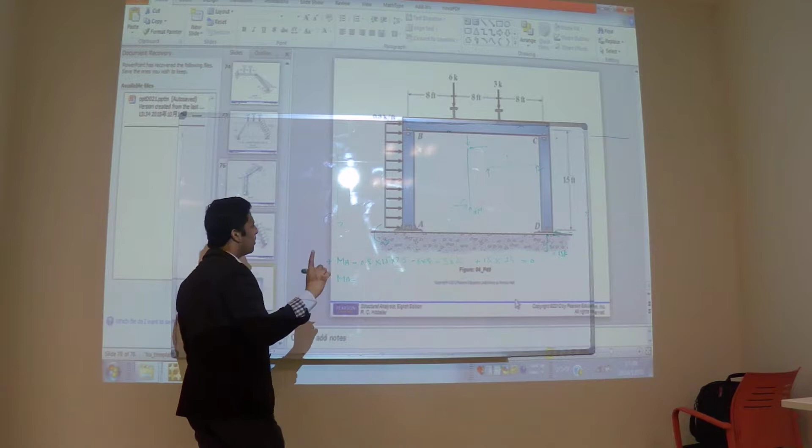I'll come back, but your homeworks remain still there. Now I told you this is B, A, and it is B, B. So now BA is equal to BB, you know this.

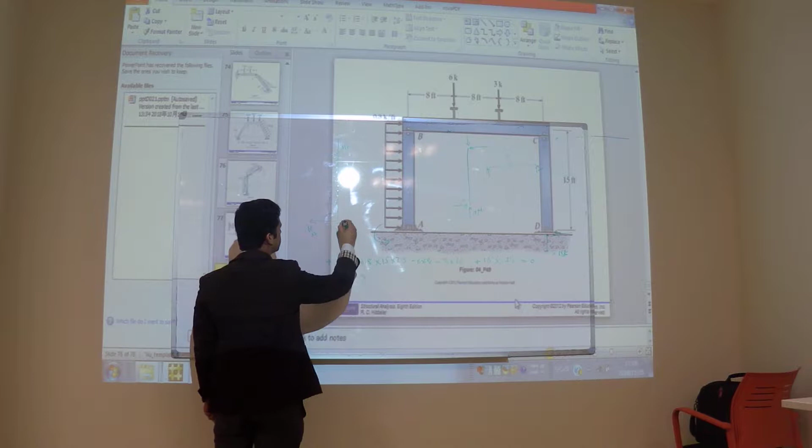This is HA, and M is how much? Whatever, you know this value, you know VA. Only HA is unknown, and now you can apply sigma fx, or you can apply, because there is one more here, I think it is HB. So you can take a moment here, you will get HA, because you know this moment, and once you have HA, you can apply sigma fx, you can get HB.

Is there need of homework, or you can do it? Yes, well try this at your home. But this is the only trick, the moment, which I explained to you right now.

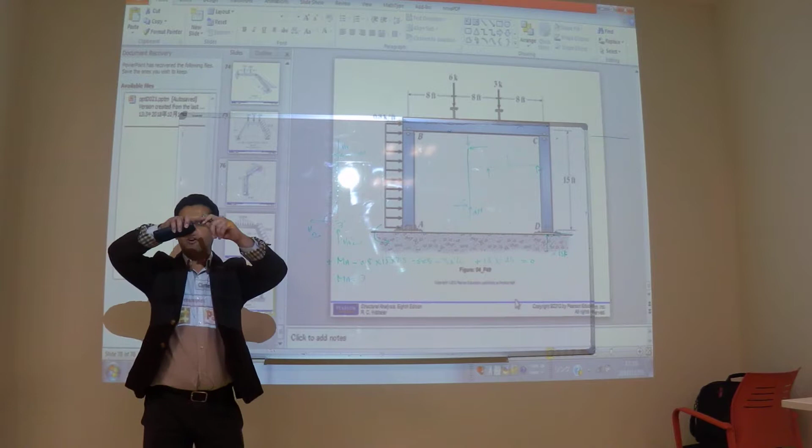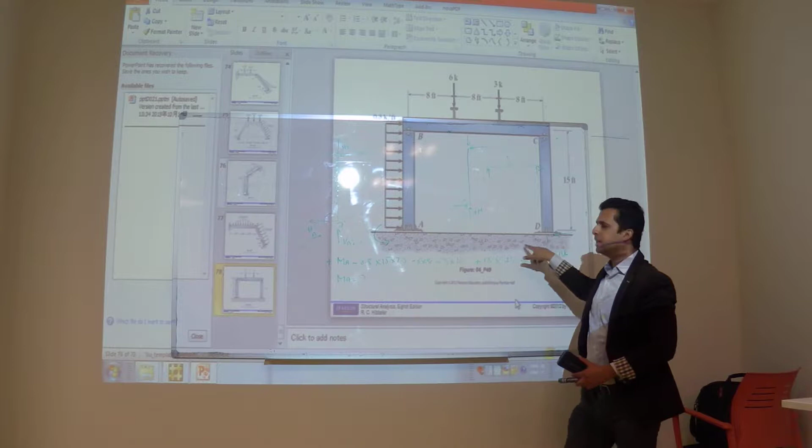First, divide into components, like this member separate, the other member separate, this member separate. Apply sigma fx, fy, sigma fx, fy, you will get the whole vertical reaction up to this point. And then consider this structure as a whole. 3 reactions here, 2 reactions here. Apply sigma m, you will get this m. This is the only thing.

Well, I don't want to teach you this today, but we have done it. If you still want me to solve one example, I can do that.

Victor, we want the example with frame with no pin connected. We already did, no, that's how we cut it.

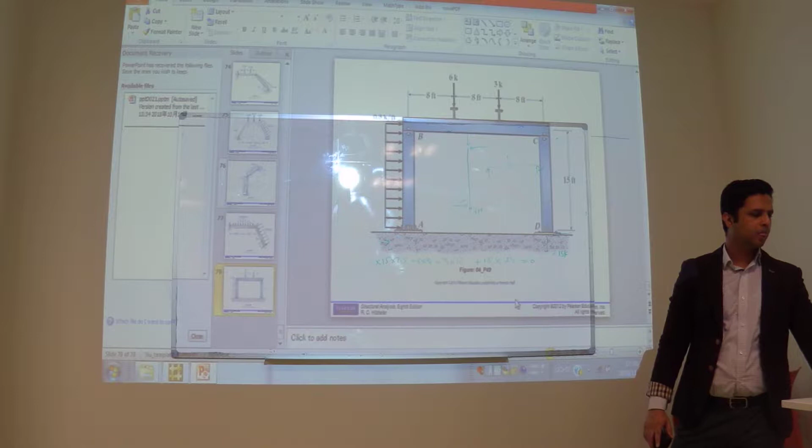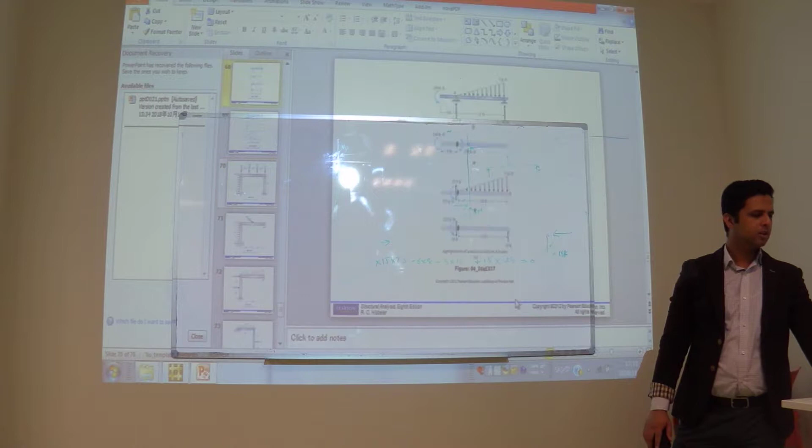We consider that as a joint? You mean this? No, the before one, but in the frame, this condition. No, there is a joint. No, there is something, just one X. It's all fixed. We did in our last class. Yes, but frame, not frame, we did just the half. No, we did, before that, we did some problem, something like this.

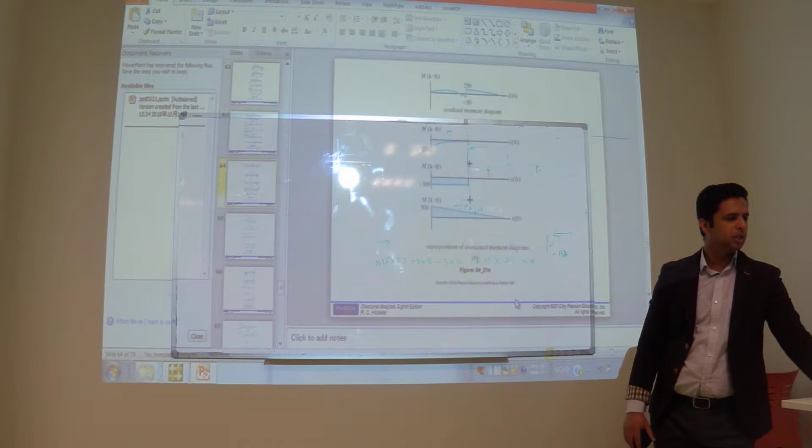If I remember, yes, there was a load like this, and 2 reactions, something like this, and you have one vertical load here. Yes, yeah, it is fixed. So how we cut it, Victor? No, we did not cut. We cut it and make the reaction.

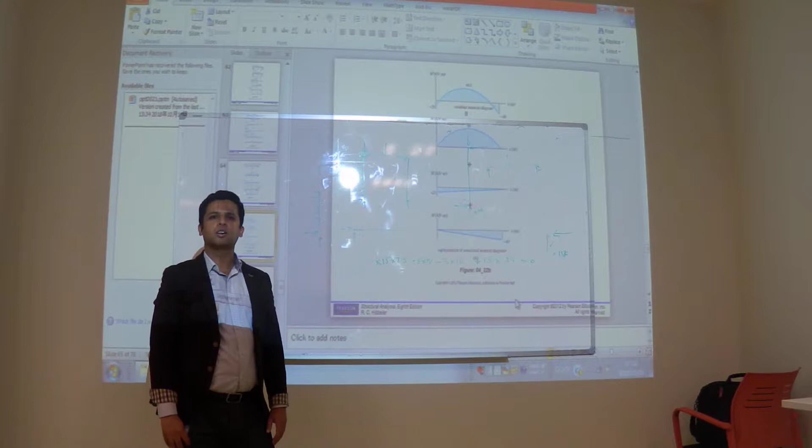We, for example, we just consider first this part, then we apply sigma fx fy, and then we made this joint, yeah, we made an equilibrium, these forces we transfer from here to this B. We have to, we have to separate it. Because yes, it's just one shape. So we did that, okay, we have moment also in this, here, in the corner, up corner.

Yes, we also have the moment here, I remember there was a moment. So then you transfer this moment from this joint to this joint.

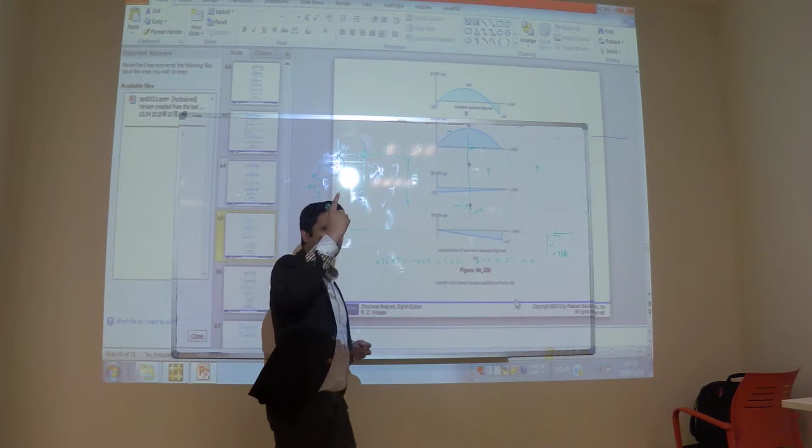Just revise my previous lecture. You know, I told you, if you do not revise your previous lecture, it's gonna be very hard for you. Structural analysis is not like history or some social sciences, so that if you come back, everything will be in your mind. Until and unless you repeat or you study the previous class, I don't understand.

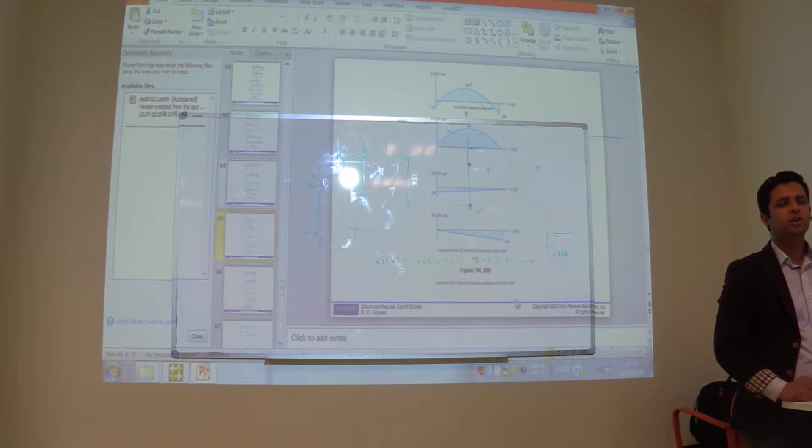Now you are at the peak of shear force and bending moment diagrams for the beams and for the frames. And from here we will go to the next level. We will not go down. Okay, do you have any other question?

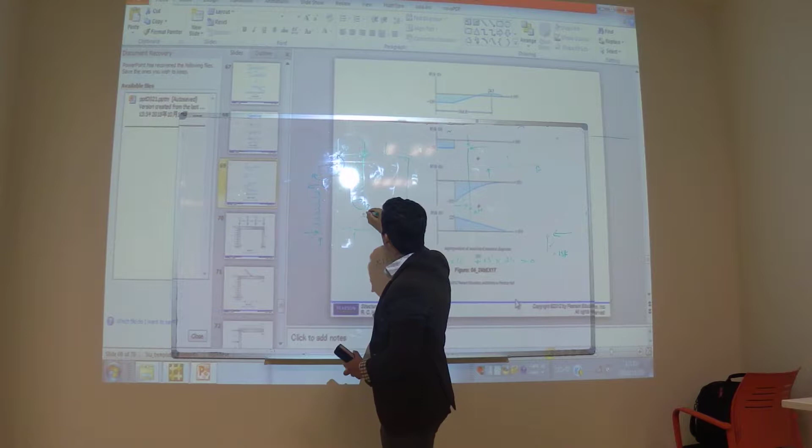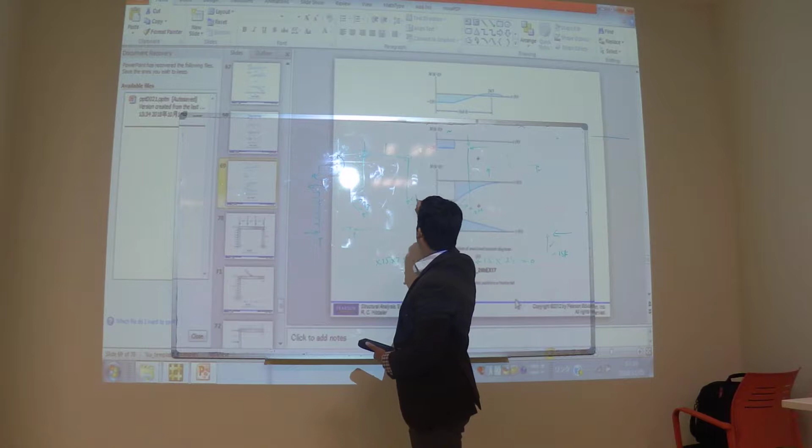So this frame, there is a fix at A, but in our last class, for example, if there is a fix here, so moment M, now you cannot solve this frame. Now this frame is known as indeterminate frame. If a frame has two fixed supports, one fixed support here, another there, it will become indeterminate. You cannot solve this frame now. Do you understand? Yes, two fix, but just one fix we can solve it.

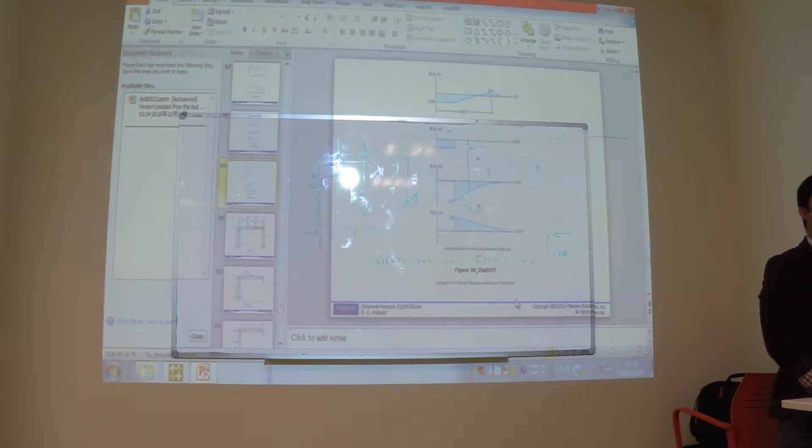Depends, two fix we cannot solve. You have to apply the equations for determinacy and indeterminacy. Okay, you have to check.

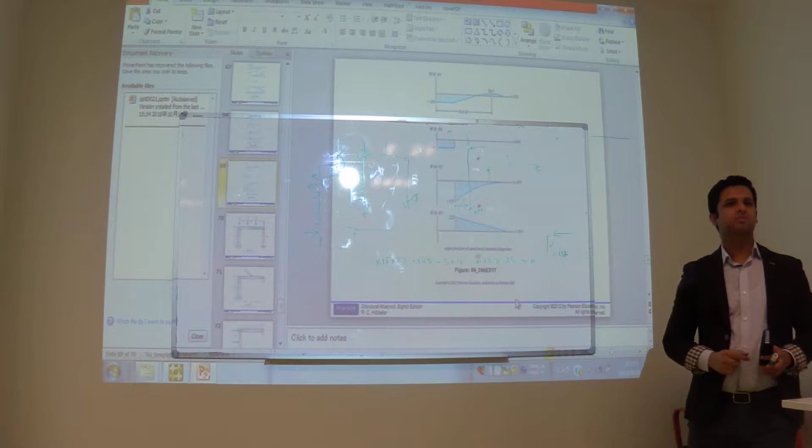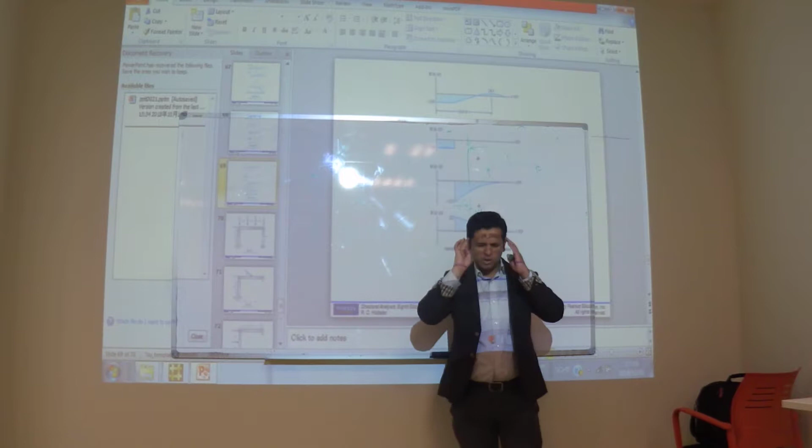Okay, one last thing, and I think today we are done with this lecture because we are left with just 30 minutes. I didn't really plan to teach you all this, but now we are left with very limited time. The only thing I wanted to tell you now is the method of superposition.

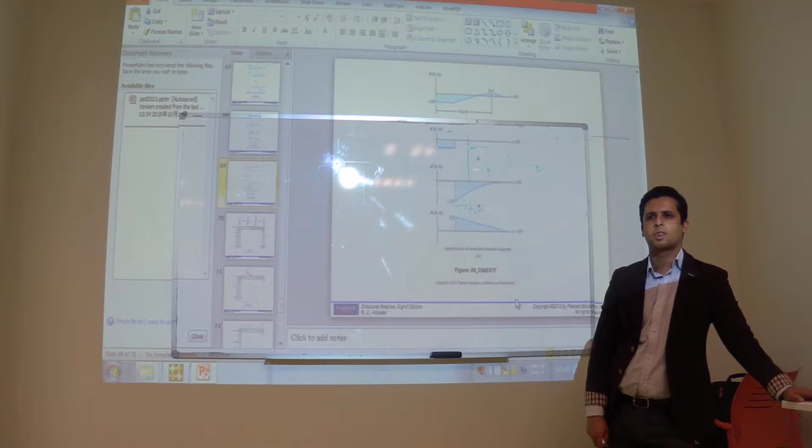Superposition - what is that? Can any one of you explain it to me? I think I already told you this before - to make something stable, to connect like a hinge with a roller.

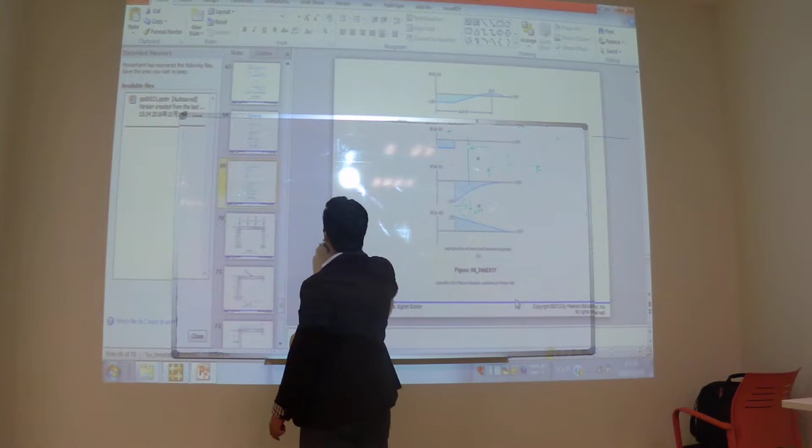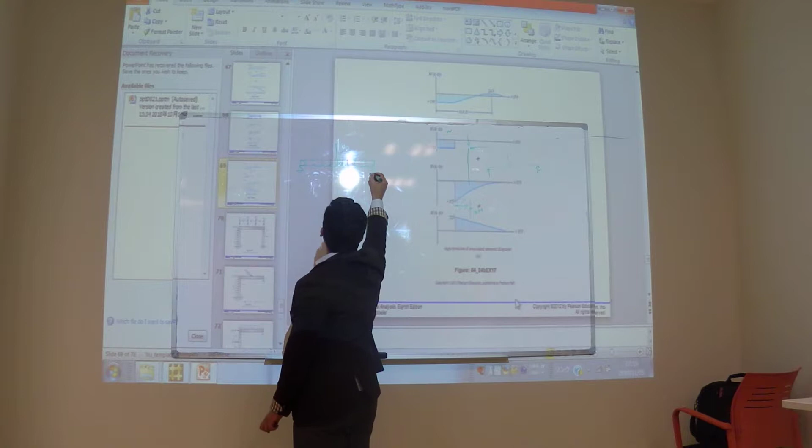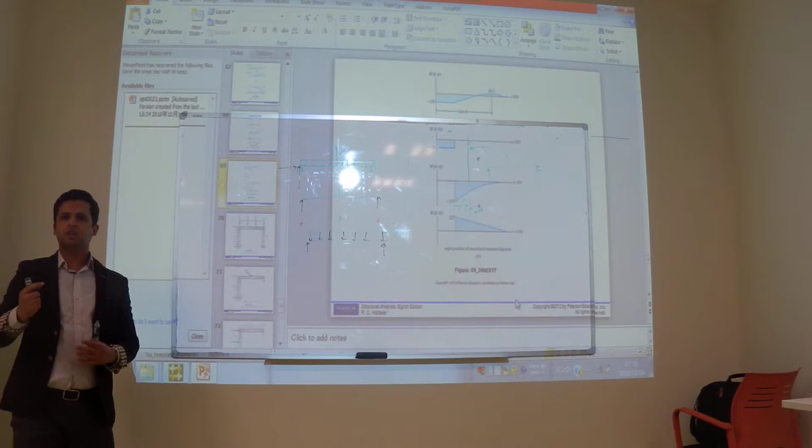Okay, and you will find reactions. So this beam will be equal to the two parts, so these reactions will be the summation of these two reactions. The same way you can draw the shear force and bending moment diagrams and combine them. For example, you can find two moments and the sum of the two moments will be equal to the moment at this point.

You can use this method, but it's not preferable because you have to make two bending moment diagrams and two shear force diagrams. Yes, teacher?

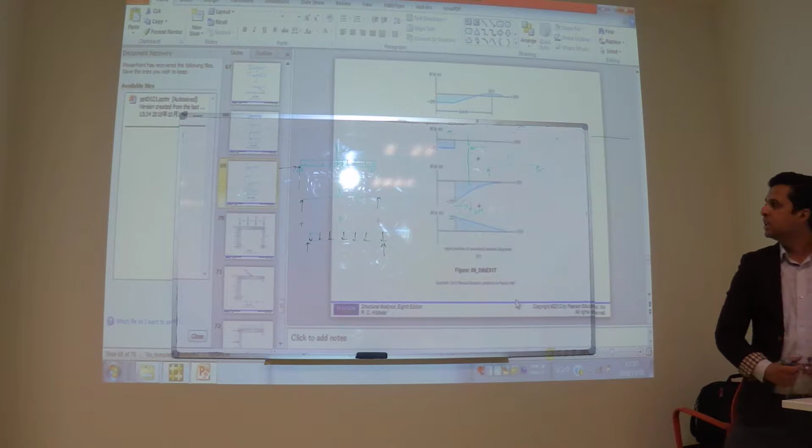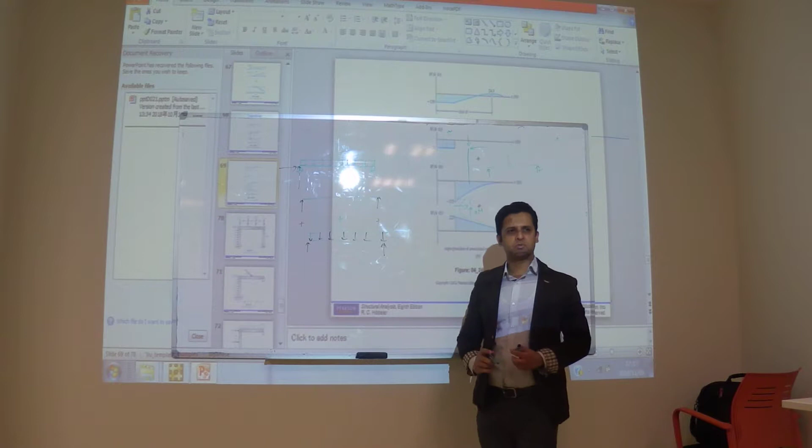But for that, your material should be elastic and it should follow Hooke's law - that is the main condition. If your material becomes non-linear, non-elastic, then you cannot use this for design or for analysis. Then you should use another method.

If it is not cracked, before cracking, you can use the finite element method. Or if it is cracked and separated, you can use the applied element method, or the distinct element method, which I think is beyond your scope - that is a researchers' area, and I don't want to bring you there right now.

Okay, well, now what next? What I actually planned for you to learn in this class was the same thing but with the computer. You know, for determinate structures, like I told you, if you have a frame where this joint is a fixed joint, not a pin, then in that case the degree of determinacy will be 0.

But if you make even 2 hinges, now the degree of indeterminacy will become +1, and you cannot solve this frame by these methods. In that case, you have to use a special method, that is the finite element method. Or there are some other methods for indeterminate structures.

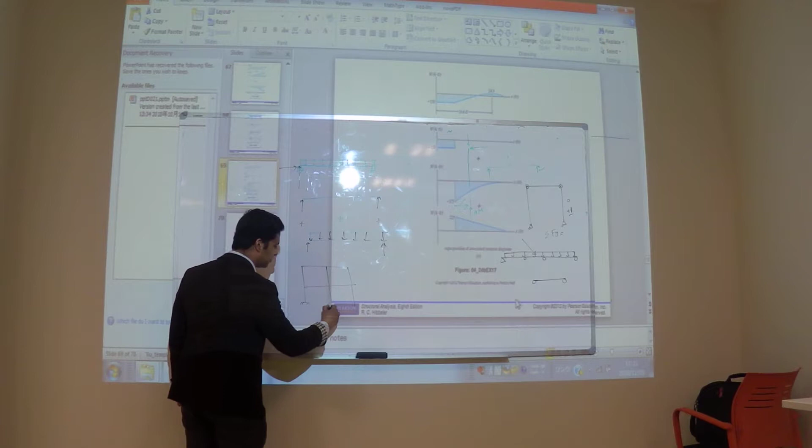How many reactions now for the whole structure? 9, 9. How to solve it? 9 directions, yes. Have you seen a frame of a building? This is a 2D frame. If I make this frame in 3D, like one column is also here...

So how many reactions now? 18, only a small 2-bay. If I make it a 3-bay, you understand? And at each joint there are also 3 reactions, 3 forces. Each joint. How to solve this structure, this frame?

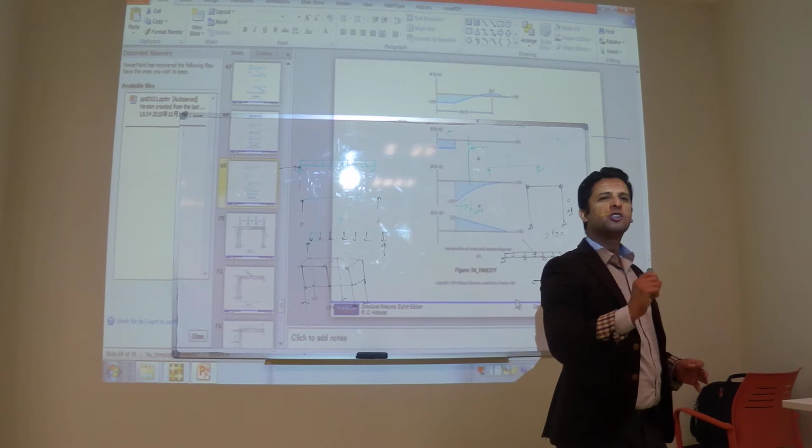Have you seen a building frame? I think when you go nearby, our ultimate goal is frame, not truss. You will not design trusses. Maybe sometime you do, like in steel buildings. But for reinforced concrete buildings, most of the time you have to design frames which are multi-story and which have huge area, with so many bays in both directions.

How to solve it, how to draw the shear force and bending moment diagram. Just think in your mind. Can you do that? Just close the book, leave college and engineering. No. Then we have the computer aided methods.

From indeterminate structure, the stiffness method and the finite element method come into action and take responsibility for all these things. So then you make a matrix, then it comes mathematics. I wish I could teach you the stiffness method. It's my wish, my desire. But I cannot fulfill that in this course because it is not included.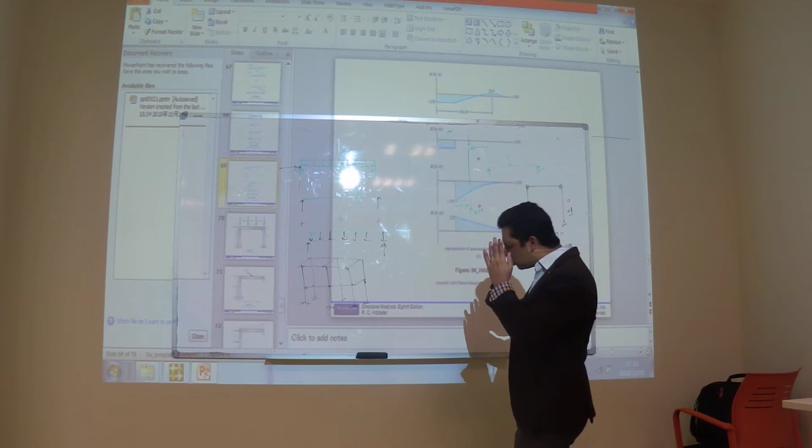But if you do not learn how to solve this frame, how to find the reactions, how to find the shear force and bending moment, then I think you'll feel something missing in yourself as an engineer. Am I right? If you graduate and don't know how to analyze this frame, then there is a big flaw, a big loophole in your mind, and you will always say that our college did not help us and we cannot learn.

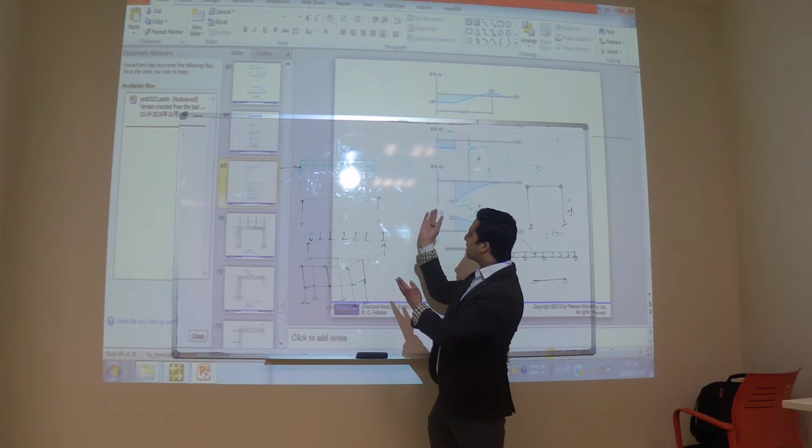But what can I do? If I have to solve this frame by the same methods, then maybe I need at least 6 weeks to tell you about all these things. But because we have a huge and intensive course, what I'm going to do is tell you how to analyze these frames in computer, so that at least you can do something.

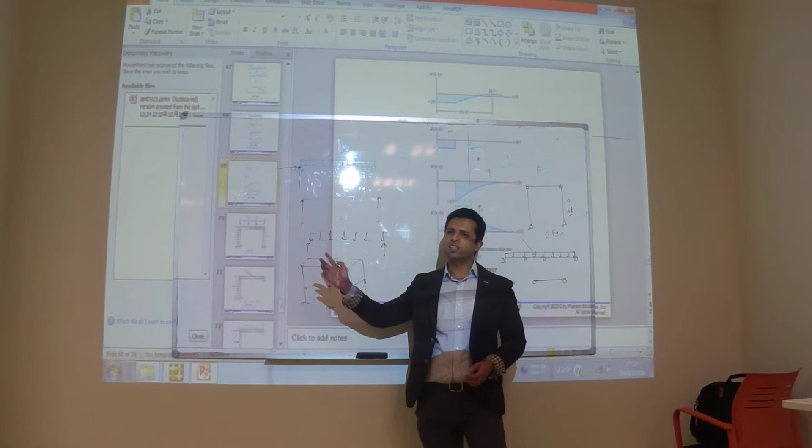And for your surprise, 99.9% of designs of such frames are carried out in the computer. No one does it using manual or hand calculation. It will take forever. So it's a kind of good news, and it should make you happy that once you learn this, it means you can use it for your real design, for your real structures. Do you understand or not?

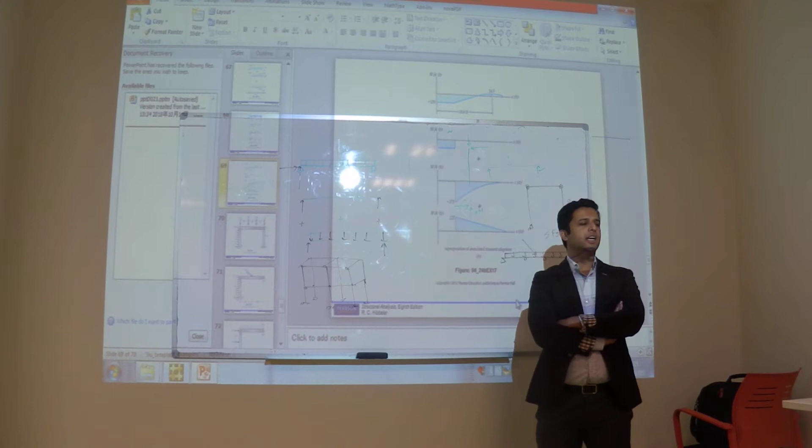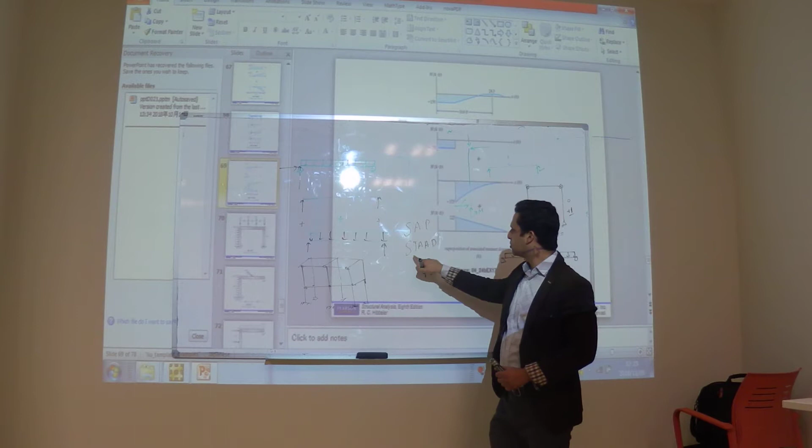So that is the first step, and we have two programs which we can use for computer aided analysis. One is SAP, Structural Analysis Program. The other one is STAAD. STAAD stands for Structural Analysis Program, or Structural Analysis and Design Program. Well, it also does design -- SAP also designs, but that is not included in the name.

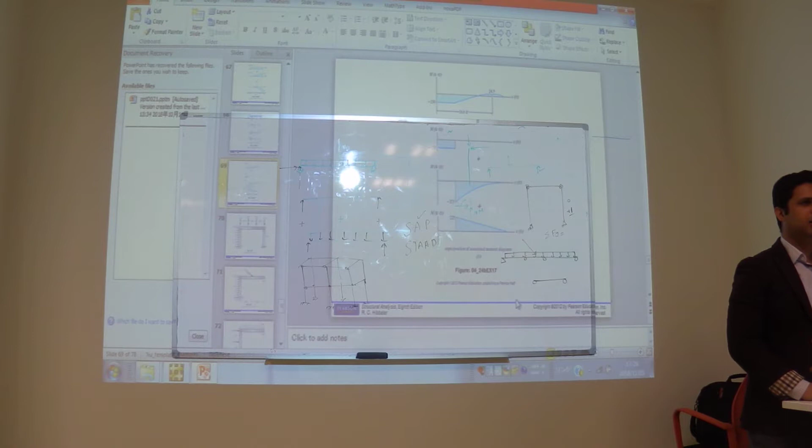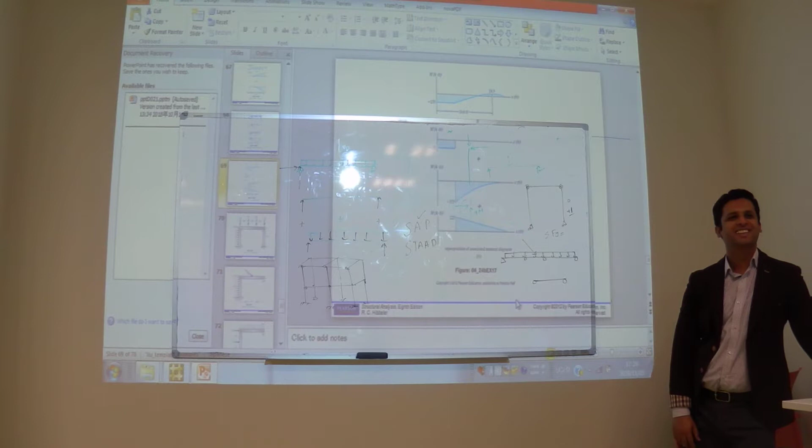So I give you a choice. Which one do you want to learn? Which one is more common in the field of jobs? For concrete buildings, the first one is more common, and for steel buildings, the second one is more common. The first one, and the second one.

Relevant to this, SAP and STAAD -- but remember, these two are in two opposite directions. STAAD is totally different from SAP. If you know SAP, you cannot use STAAD. If you know STAAD, you cannot use SAP, but you only need one.

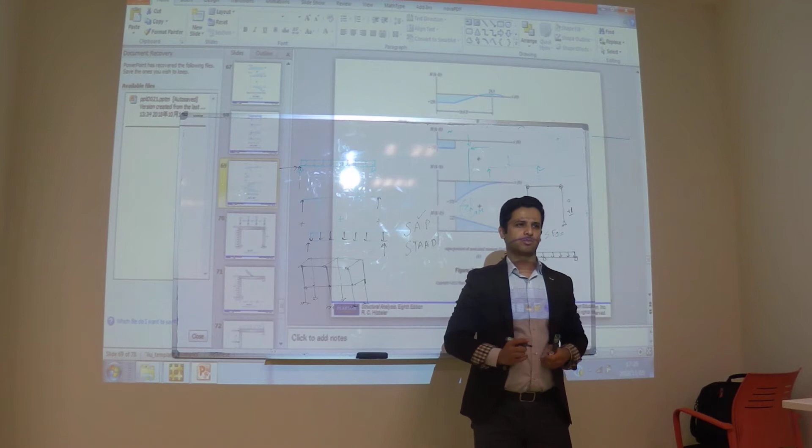For example, let me show you some of the drawings. I use -- when I teach, most of the time SAP, but when I use it myself, STAAD. Why? Because most of your work will be with steel design, and my specialty is more towards steel than concrete design.

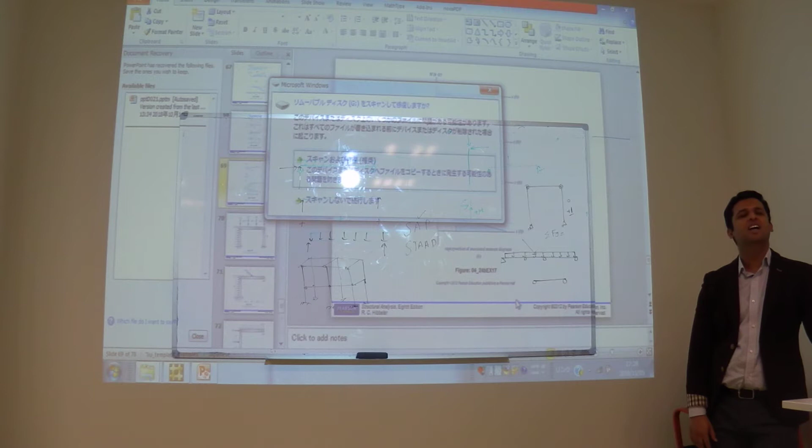It's a kind of refinery. It's not located in Saudi Arabia—that project is somewhere else. But I did only the steel work on that.

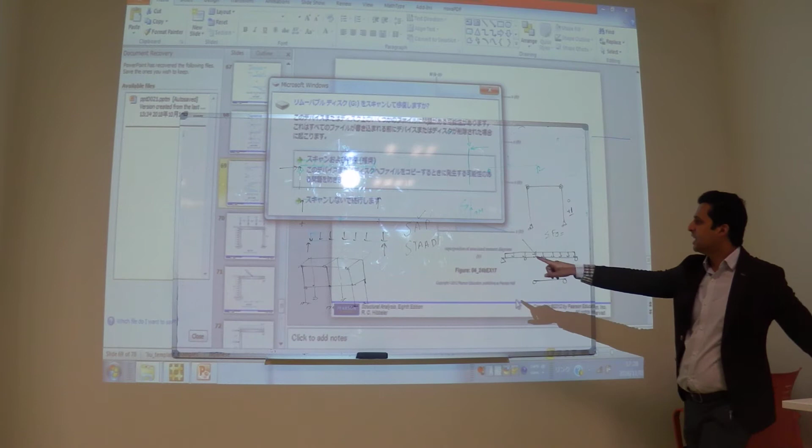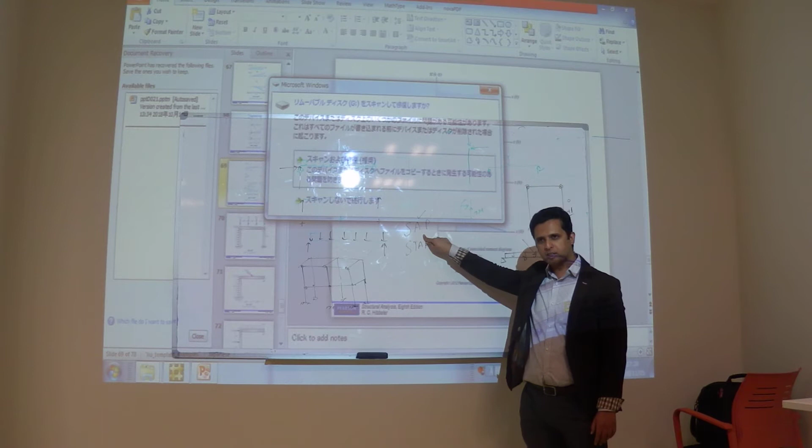I did the modeling and everything, and prepared the drawings, everything on STAAD. But SAP is much more versatile. It's highly appreciated, more acceptable, has more features, is easier to use, has a better graphical interface, and has connections with many other applications.

So let me show you something. SAFE—it is for foundations. Just hold on for some time.

This is the problem which I discussed some time ago.

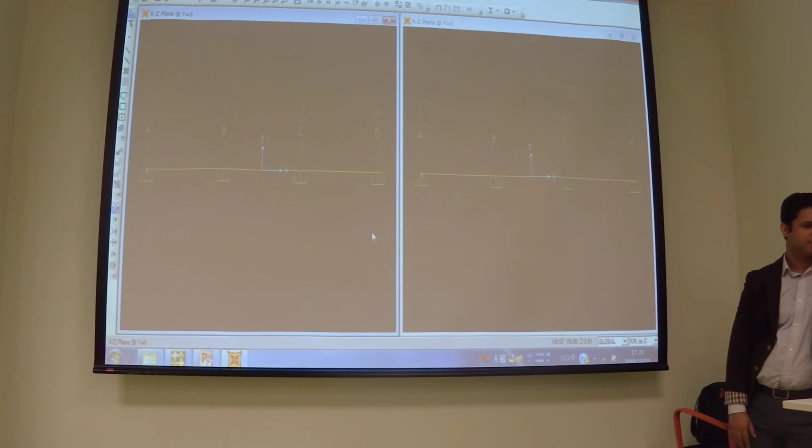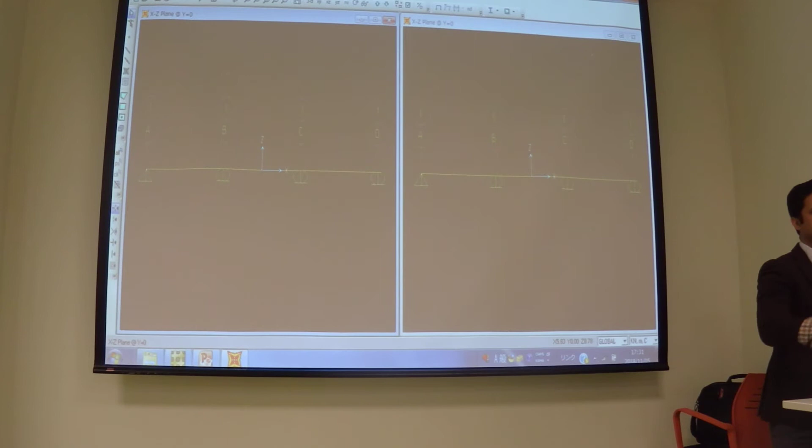Now in the next class I'm going to teach you how you can solve such types of indeterminate structures using computer software.

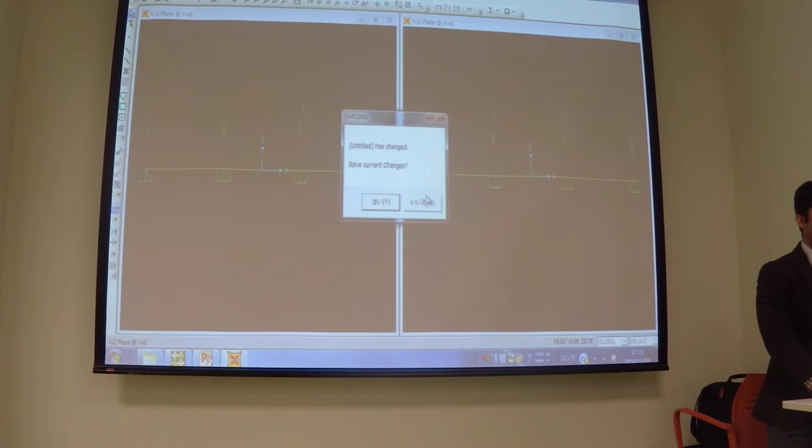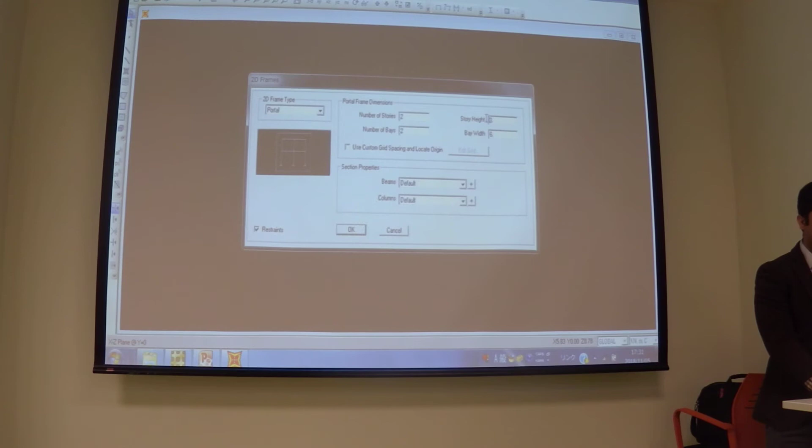There are some examples, for instance 3D frames and 2D frames. Like you can tell, for example, the frame I just prepared in front of you has 2 number of stories, 2 bays, width is 3, and the story height is 4 meters. If you click OK, you can see that 2D frame.

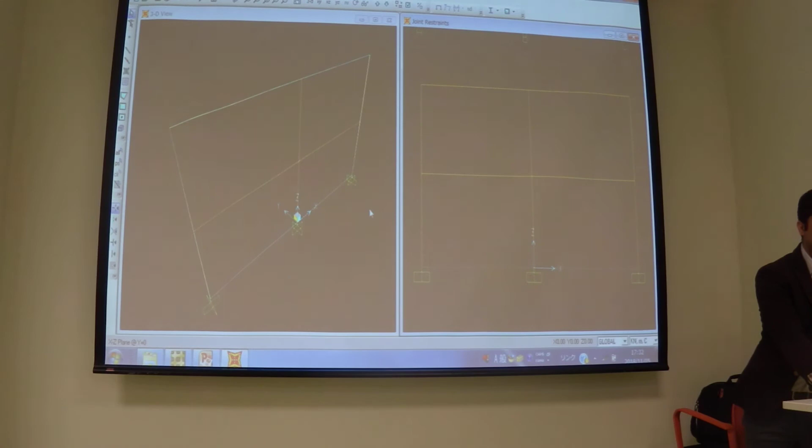This is the same frame, but here the support is a hinge. You can convert this support into a fixed support. Yes, now it is a fixed support. Do you understand? So in our next class, I will teach you how to analyze—meaning how you can draw the shear force and bending moment diagrams of such indeterminate structures using SAP.

Does it give a single number, like this reaction is 50 kilonewtons for example, or does it give a range? It gives a precise value.

It depends upon how many types of load you are going to apply. If you apply one load, it will give you one reaction. If you apply 10 different types of load, it will give you 10 different types of reaction.

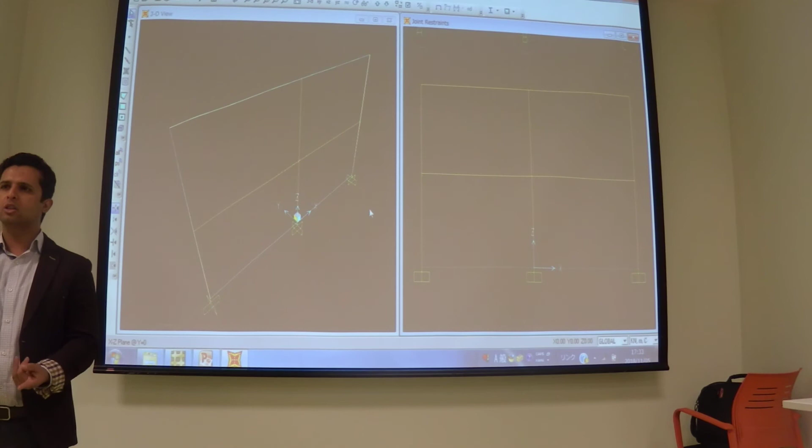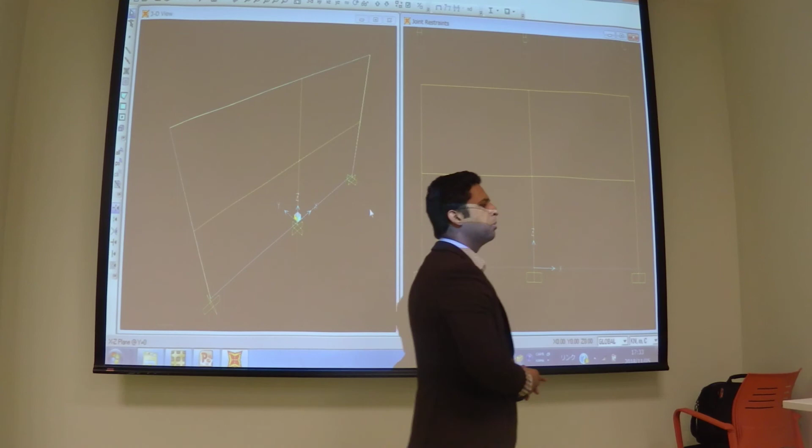In real design, we apply many types of load: dead load, live load, lateral load, lightning load, false ceiling load, earthquake load, wind load. So we get the reaction for all these loads. But for gravity loads, you can combine the whole number of gravity loads—dead and live you can combine, and you get one reaction. You understand? But it can give you as many types of load as you want.

For example, if you go and see the different types of load patterns, you can have dead, super dead, live, reducible live, roof live, pattern live, notional load, quake load, wind, snow, temperature, bridge live, wave, LL structure, wind and live load together, locked in, or horizontal earth pressure. There are so many types of load which you can apply.

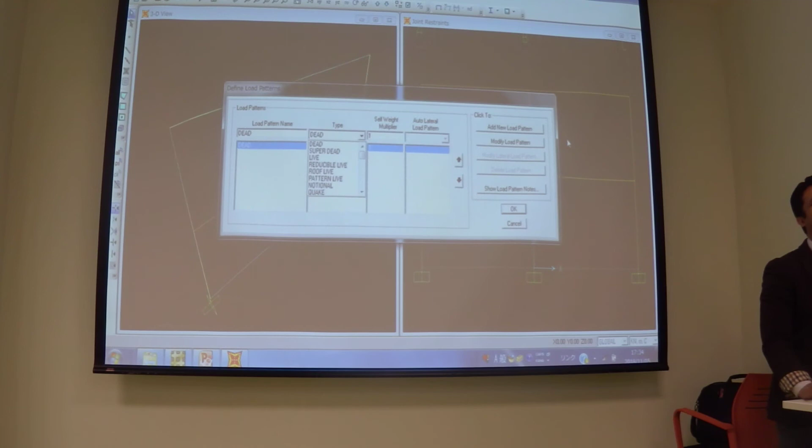What is the difference between dead and super dead? Any one of you? The super dead is like Superman. No, it's not like that.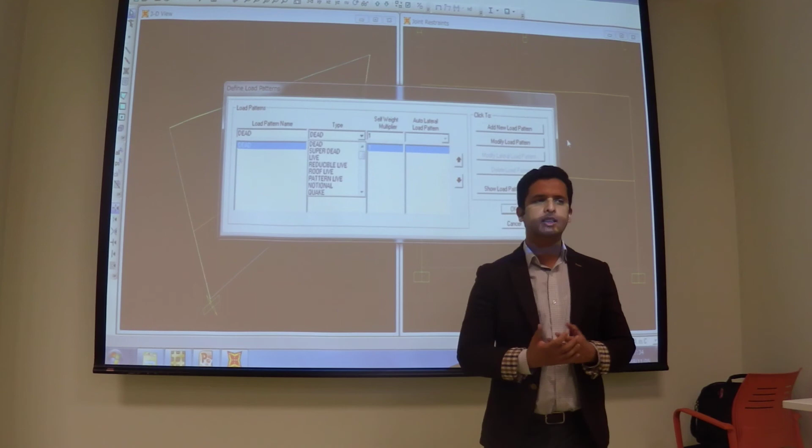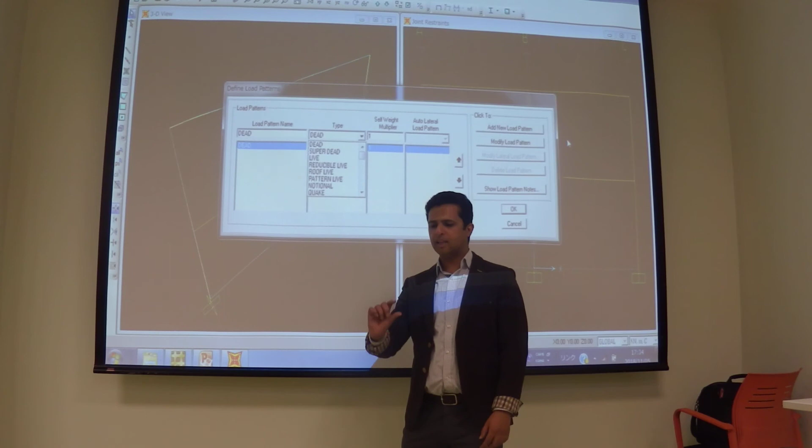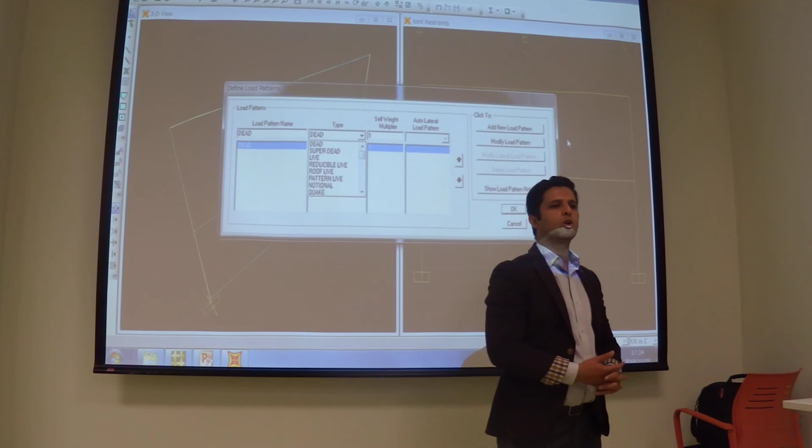There are two types of dead load. One is the self weight of the structure itself—that's dead load. Super dead load is, for example, if you put tiles on this floor, if you put sand, if you put any thick layer of material on this floor, that becomes super dead load, which is above dead load. Do you understand? Yes, so we call that super dead load. But there is no super live load.

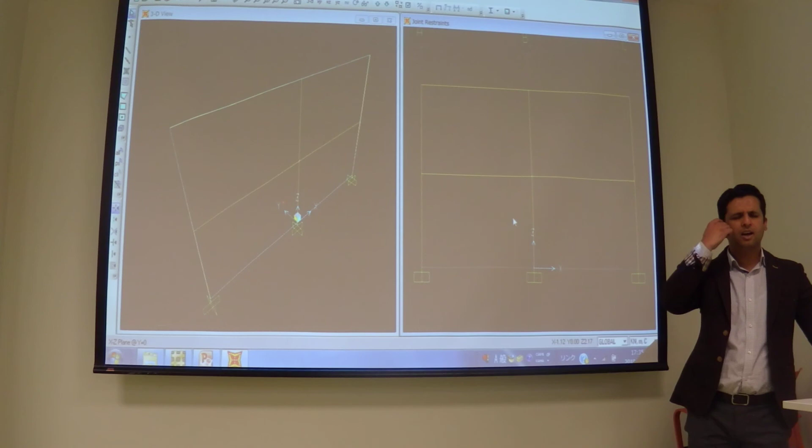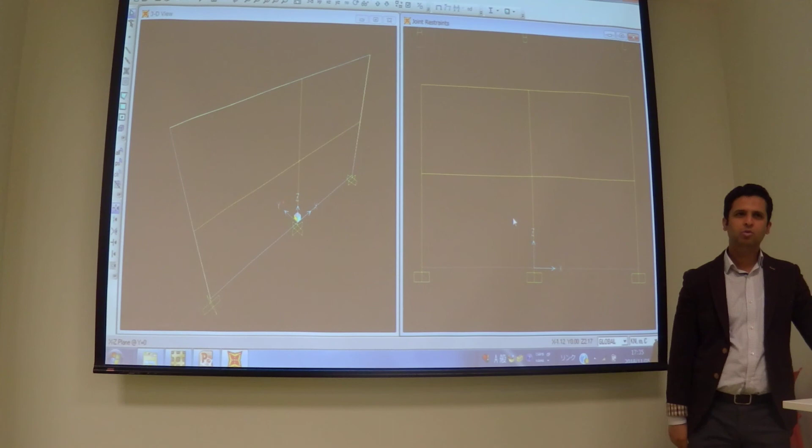So we will learn. I had planned to tell you in 2 classes about this software—I think that's enough. For the rest I will refer you to my videos, which I will give you. I already have so many videos about how to analyze and design using SAP, ETABS, and SAFE. So here I will give you just beginner level videos, a beginner level introduction, let me see if I can find it.